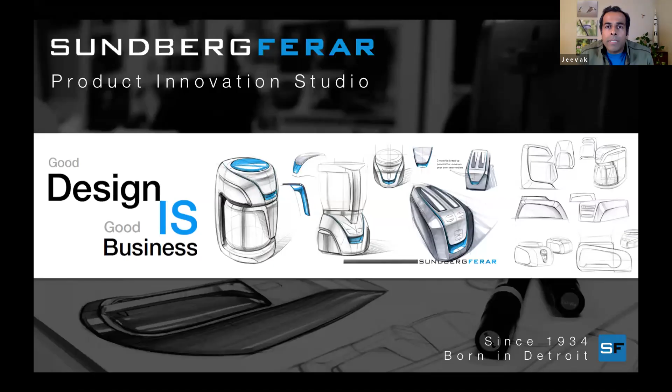Thank you again for having both of us, and Sundberg Ferar, for this wonderful evening. I know we have a time docket of 15 minutes, so we'll try to cover specific elements during this time. As we start, we'll introduce a little bit about the studio, and then jump on the theme of the evening, the collaboration part, and then we'll try to show some real world examples that are happening right in the studio back over there, so we can talk and discuss about that.

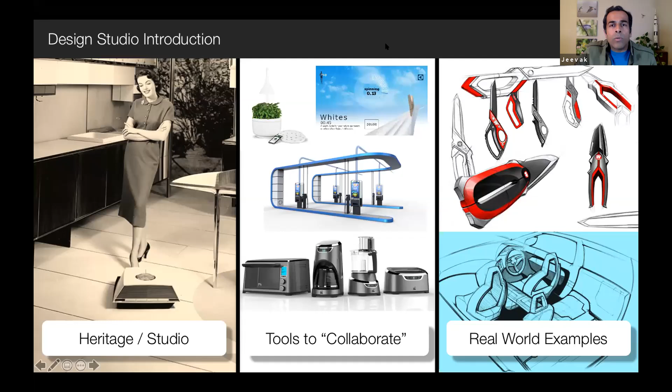We are proud to be born in Detroit. Not me, obviously, I was born back in India. I came here only 19 years ago, but the studio is one of the pioneers of industrial design in the entire nation, and I'd say North America too.

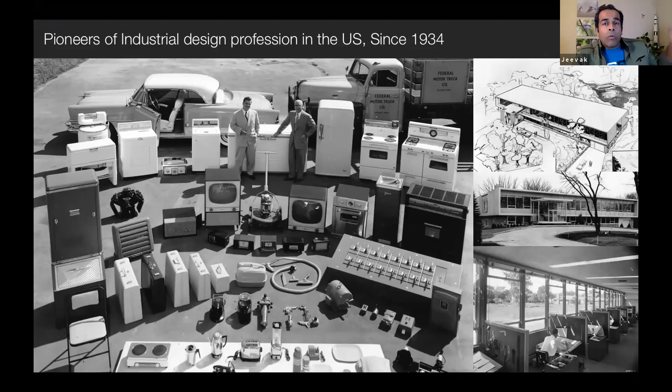Since then, we've been doing objects of everyday use, B2C, B2B, and a range of different things. From there till today, we still precisely do the same things. The culture, the context, the ecosystem around the objects change, but we as a human species are highly reliant on objects and the way we have to think about human centricity behind that. That's what makes design more and more interesting.

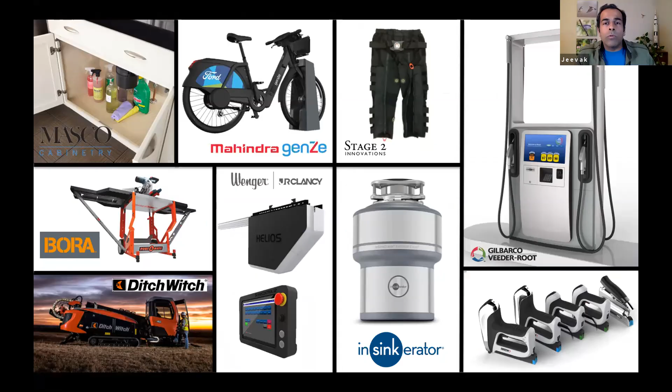B2C, right now, what you'd be seeing is more B2B. But before we go further, it's a team over here. Right now only me and David are representing, but we are a team of around 20 people, all based in Detroit, no other branch anywhere in the world. Together, we make design happen.

It's a design consultancy. We work for startups, we work for middle-sized companies, we work for big entrepreneurship, big enterprise companies also. But one thing people always mistake about an industrial design studio is they think we're a bunch of kids with markers and crayons in our hand, and we just do things beautiful.

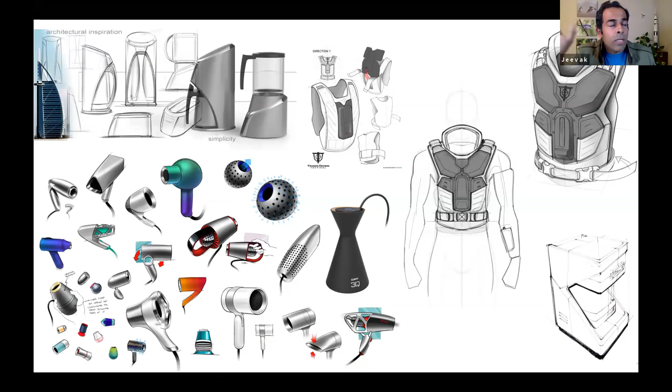Literally any good design studio anywhere in the world will always start in the world of usefulness, the use cases, the usability, the efficacy of use, the efficiency of use, the ergonomics, and then eventually into the world of beauty - meaning beauty will always be there, packaged in that. But understanding how it evolves in the entire ecosystem is the main element we have to focus on.

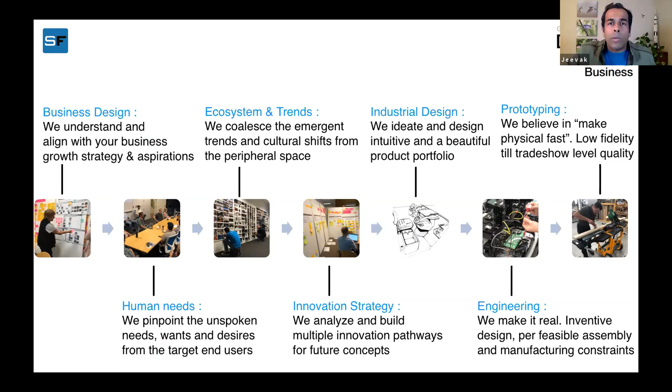That's basically about the design studio as such. About the context of collaboration - it's such an important word to go forward with. We have to begin to understand what are the best ways to collaborate, how to make sure ideas transfer from my mind out on the table, and then into your mind, through a whiteboard or any other fashion. As a design studio, we typically immerse ourselves in the world of 2D ideation.

Eventually sharing that with the studio and making sure we're collaborating with other disciplines, collaborating with vendors, with the super users as such. But one of the predominant tools we use for collaboration is making sure to have some physicality of the product right in the discussion - not just discussing in the air, not just with a sketch, but actually using a 3D sketch, a typical scenario in our process.

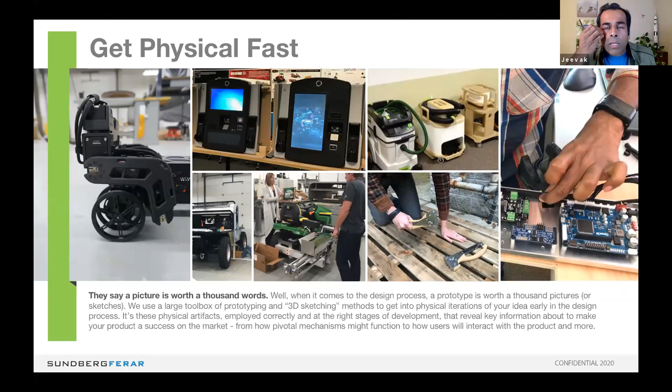One of the things we'll talk about today is the collaboration thing, how we use the Get Physical Fast tool - the mockups, the prototypes, the board, breadboard model mockups as such - to help get your idea from your mind outside so people can start collaborating.

It doesn't necessarily start with a sketch. If it does, eventually on the upper right you'd see there would be a low fidelity, low precious material model to be done to make sure people can react to it, respond to it, rather than anything else. Somehow my presentation is going on auto slide, but that's okay, it's just happening on the way.

So we'll be spending today's time understanding how to use that tool to really collaborate the idea and not lose plenty of things in translation. There's a range of different elements you can use apart from other tools, but today we'll talk about collaboration and how we can use it at different junctures, because we need that for a range of different things.

Case in point, a forklift - you and me all here right now can drive a forklift, maybe for 10 minutes, maybe for 15 minutes. But are we the super users? Are we using it 10, 12 hours a day, 6 days a week? Absolutely not.

As design studios, we can bring in the best practices, the ergonomical reach zones, the grab elements, the visibility angles, but we try to make sure you extract things. When you say participatory design, you have to go and make sure you extract those things from the real end users. And for that, just asking a question or filling a questionnaire is never enough.

Sometimes you have to create that stimuli in the warehouse or the elements where the forklifts are used. Go there and make these models. It is not design, it is still a 3D sketch. It is there to extract how people will react to it. And then we make sure we understand those elements.

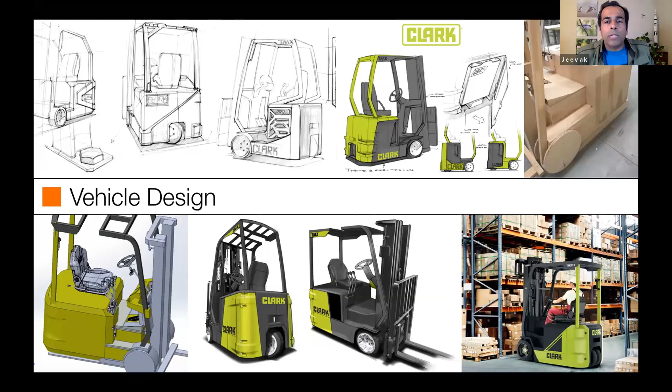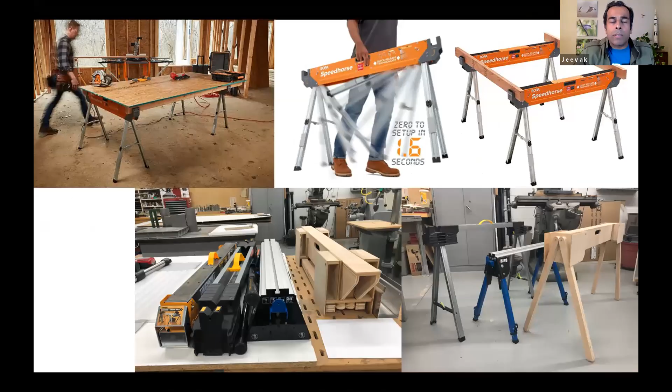So let me pause here a minute, and I will let David talk about the different ways we use design for either design research or the final part of design showcase. But right now, let's talk about design as part of an active innovation sprint. David, you want to add your thoughts about the way you use prototyping methods?

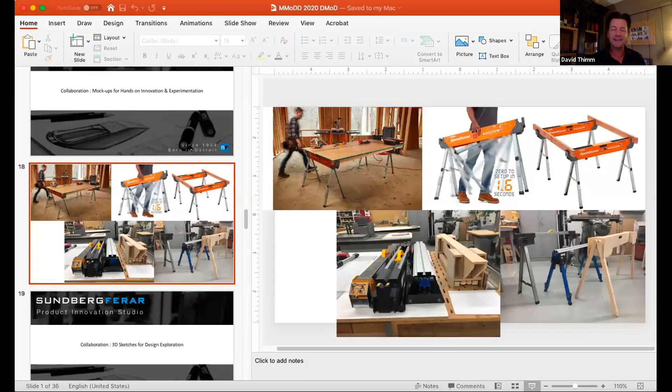Yeah, absolutely, it's such a valuable tool. I'm a CCS graduate from '91, and it was such an important part of the curriculum because instead of just trying to print things like many processes now, you actually had to go out and build it. So you learn a lot, just physically how things go together, what's strong, what's not. But it's also from a mechanical standpoint, anything that has motion or someone's going to pick it up and touch it with their hands.

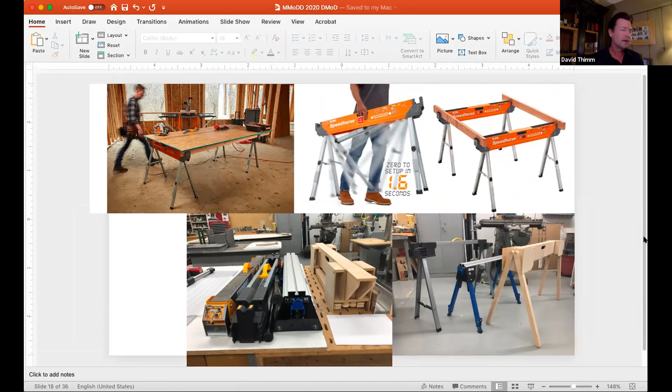It's super critical, because you think they might grab it one way and then you see they use it and hold it another. An example where you've got mechanical motion, you're trying to achieve a goal of deploying a sawhorse the fastest way possible. So you've got motion, how do you pick it up, what happens when the legs come out? The first mock-up you make, the leg hits you in the knee - okay, that's a valuable lesson.

So now you have to change that, right? Now it needs to drop down and swing away from you. So we use this as a tool for ourselves personally as we're trying to work out thoughts, but mainly as a collaboration tool, because now with our client, we can demonstrate why maybe a direction that they thought was totally appropriate and they were excited about, why it didn't work.

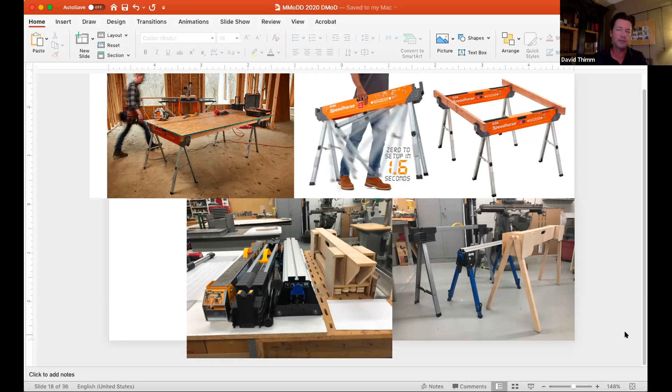So you can take them through the process this way very quickly and learn a lot and move forward. And now you have a foundational start for a mechanism, where you can get into that CAD and get more detail, but you can really get everyone to agree and move forward on a concept, developing it physically like this first.

One of the main elements to add is why people seek us out. As a design studio, one of the reasons they come to us, apart from plenty of others, is the rapid response, the agility, and accelerating the product design process pretty fast. Over the range of 87 years, we have found out - even in this world of virtuality and augmented reality, where we engage with a lot of digital tools - there is still no other option than to go into the real world.

If the product is going to be a 3D tactile physical product out in the world, then there is no reason not to invest a little time and a little materials to make sure there is form and function for that.

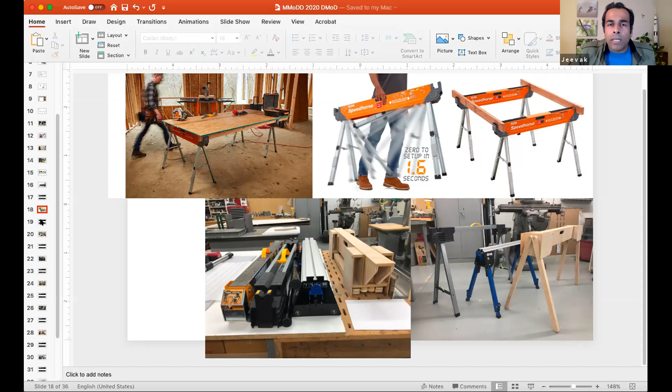As David was saying, the mechanism design, the fit, the function, the heft, the weight of it, the distribution of the weight - all those things, I would not say they're impossible to do in the digital world, but it takes a long time to arrive at that versus just going back in the shop. We have a shop and a studio right under the same roof, actively doing something, mocking it up, coming back and explaining it, and throwing that in front of the team, and then in front of the customer and the super users.

There are various different ways to make use of those hands-on elements. The fidelity is the main pivoting factor, because sometimes at the start of the process you have to be high on concept and low on fidelity, by intention, by design. Eventually, as you go from idea to concept, concept to prototype, prototype to production, you flip the graph the other way, where it's high on fidelity and low on concept.

But as soon as we start doing something, a designer or researchers come and do some sketches and renderings. At the same time, it might be a very literally simple foam core model, but getting it into the world of 3D, literally seeing how much volume it's going to occupy, how it's going to be maintained and serviced - all those different aspects start coagulating and coalescing together.

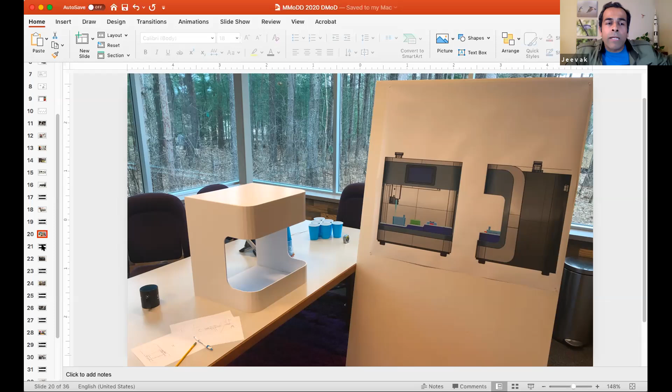So the fidelity should not matter. The way the sketch is done in the 2D world, in the same way we try to replicate that in the world of 3D in making those kind of sketches.

As a studio, we always use a physical example to go forward with, but we're also adept, and we do a lot in the world of graphical user interface and service design. Similarly, the mockups that you have to use in usability research - you cannot distance a graphic user interface from the physical product. If it is a physical product and the interaction is going to be there, it's nice to merge them together. The same thing happens for usability principles.

This is one of the prototyping shots from a gas station machine. It's still a B2B product - you and me are not going to buy it, but they're going to use it today and literally for at least 100 more years. How do you do that in reality?

The angle to be seen, where they will be at a proper height, what will be the other elements over there, and then testing out how the graphic user interface will work. Not only the design of the screens, design of the buttons, and the beautification part of it, but also the logic and the navigation and narration of how you are guided into the interface along with the architecture of the product.

Because a successful product is a molecule of four things: the hardware, the graphic user interface on it, the digital twinning of it - how you extract the data back to your place - and the service part of it. So they always have to be seen together. And the more you experiment, the more you storytell, the more better and valuable it is.

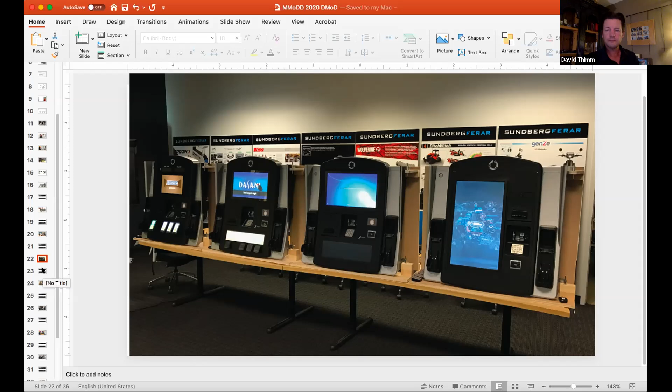So this is where, before you put hundreds of thousands of dollars into tooling, a validation tool helps gather the team around and just see things come to life. I think the critique level, the information gained, is something anyone would do, and I highly recommend it.

But seeing those 2D sketches and then the CAD come to life, something you can physically touch and move around and understand - again, all the physical attributes of the interaction points with it - extremely valuable. Shapes and blends and surfaces are all fine-tuned in this process.

This is something that, depending on the investment in it, you may do a couple of times. We do prove-out models sometimes just to work out a mechanism, something very simple. But other times it's very detailed.

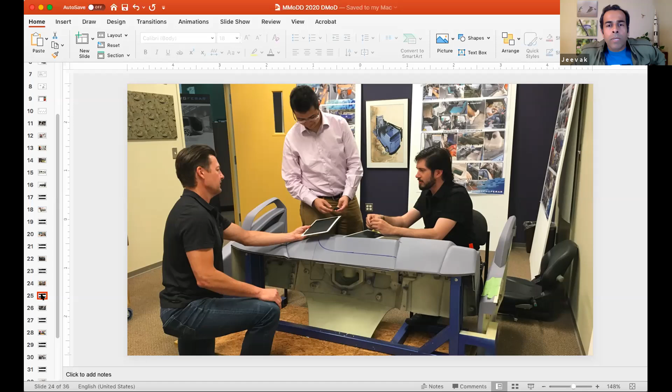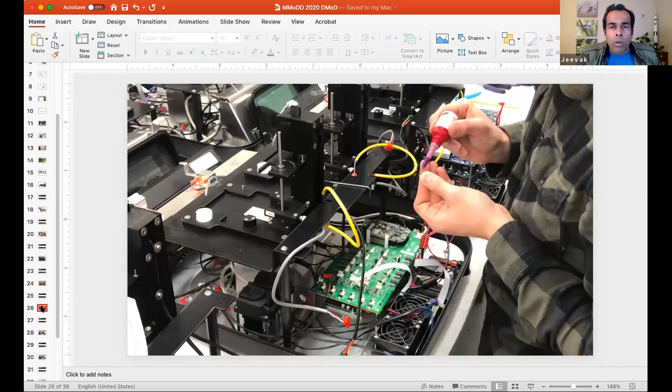So it is literally now converging together to the final pre-production or production level. There will be other elements of modeling too. As a studio, we handle the mechanism part, the looks and aesthetical part, but we also have to handle more and more the electronical parts too. So even breadboard level modeling, a different form of benchtop models, both can have parallel processes. You can start your architectural packaging from one side, and on the other parallel side, still do your demonstration and technological proof outs.

Sometimes we do it, sometimes the actual inventor or startup community does it, and we try to make sure we create the proper enclosures for it to finally go and sit in the commercial stage. When we say collaboration, it happens in the physical world, the form world, and also in the technological world.

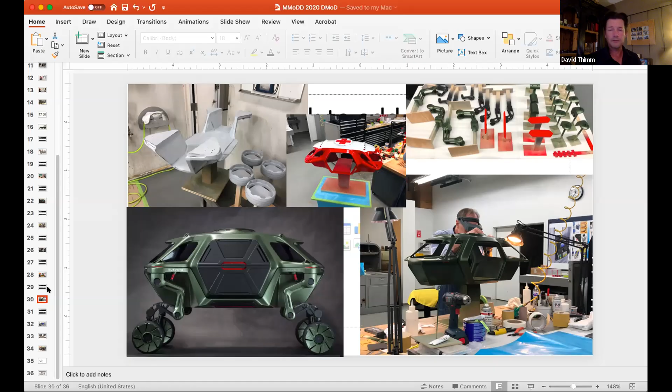And that leads to the final element of how the full functioning prototypes are used, sometimes directly as a beta field test. Once you go with the entire elements as such, you can still extend to the pre-production or production level model making, which can actually be used to test in the field the abuse and misuse that happens in the first generation of products, so we can design products to be apt, rugged and robust, and still get data back.

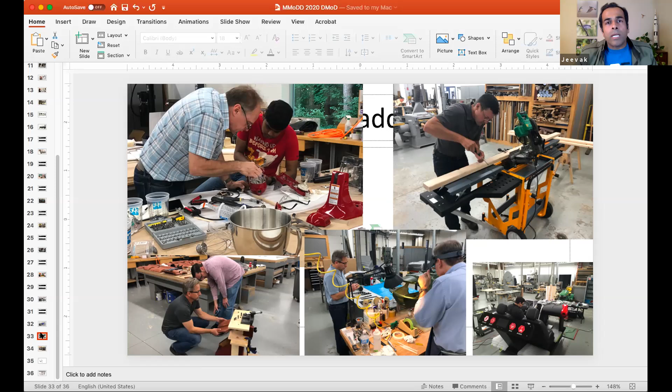So that's the full gamut of how you can use physicality as a real part of collaboration. And you will see in the closing remarks, like anybody in the studio, we are designers, researchers, strategists, business people. We all are not only encouraged, but we insist people make sure they get their hands dirty, fold back their sleeves, and just get doing it. That's how you jumpstart the entire process, and at the end you literally have everybody smiling.

I really don't know, David, what's happening over there? What makes you smile? I think we are almost at the time limit. Do you want to close out our thoughts on what we do in collaboration?

Yeah, we were laughing there because we were watching you present something on the web. There's a lot of different video out there of you, so it was just a highlighted one. But yeah, it's just a valuable tool.

And it's something we try to use at the appropriate time. So sometimes right in the beginning of a project, sometimes right at the end, or smack in the middle. But every project has a little bit different flavor, and it's a great collaboration tool, whether you're trying to understand the size of it, ergonomics, or just a visual surface evaluation.

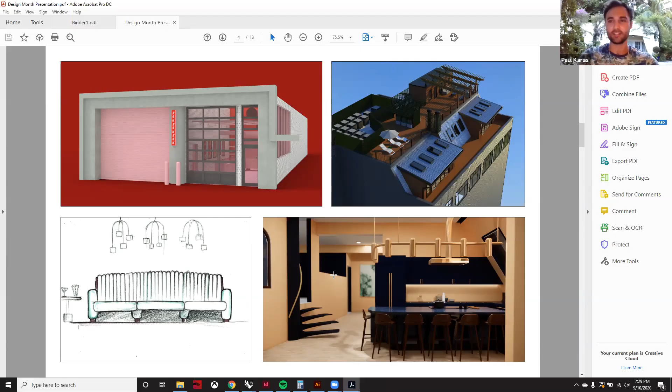Like how do I move into it, figure out where to put things, figure out what it looks like. I've been, over the years, wedging myself into this position where either I have a client that is a small business owner looking to design and build a space, or someone who has a weird extension onto their home that they're not exactly sure how to deal with.

So I'll visualize, I will organize trades behind what I design, and I will work with them to come up with really unique things. Here are some examples of more of the build side of what I'm up to, where sometimes I'm building furniture. Maybe it's something I'm building personally, but I'll contract out to a couple other people for trades I'm not very versed in. But there's other times where I'm acting kind of like a general contractor, where I'll have a carpentry team, a metalworking team, and a masonry team to accomplish all kinds of things.

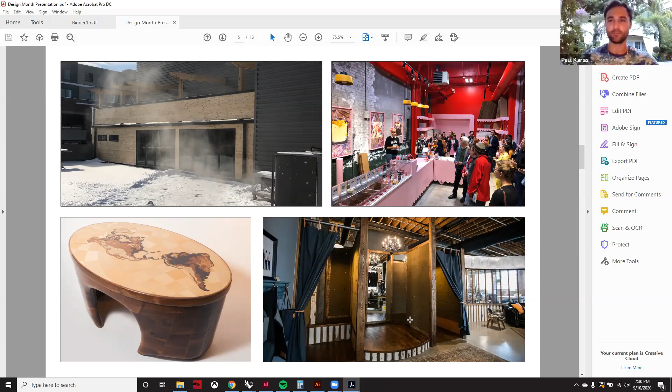So you can see some of the builds. This is the dressing rooms for Detroit Denim, which involved a lot of woodworking, metalworking, and upholstery. Connecting those dots was a large part of it. You can't just essentially submit drawings to a fabrication firm to get these things built. There's a lot of back and forth and a lot of collaboration in that.

You get feedback from the expert that might be building a certain thing, then you change your design. I would say design build is a very highly collaborative environment because of that, because you have so many overlapping trades.

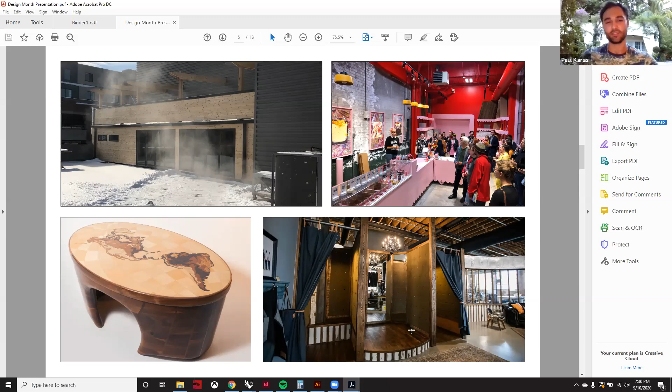So also recently I partnered with Urema Inc. I would say it's a high-end surfaces company, but similarly a design build company, where we work with artisans to create really unique spaces, really unique things. He works primarily in high-end residential, but some commercial. And I'm on the team to kind of push the visualization and push it to a different point, and organize the trades similarly as I do with my own company.

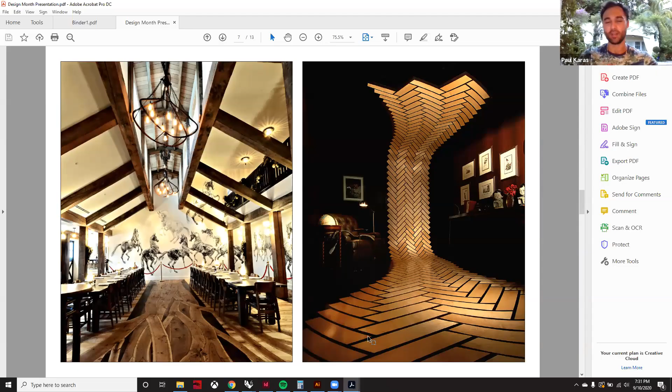This is, for example, a highly collaborative project that we're about to get working on, where as you can see we have a ceiling that is all beams. So there's woodworking, there's plaster involved, so we have to get someone to put up plaster. There's LED lighting that features certain areas of this. There's a hand-hammered fireplace that involves three different metal craftsmen to make.

And there's a lot of back and forth involved with that, so there's a lot of, hey, you can't do this, it'll have a problem when you install it. A lot of, maybe that'll cost too much to do it that way, so you should alter your design.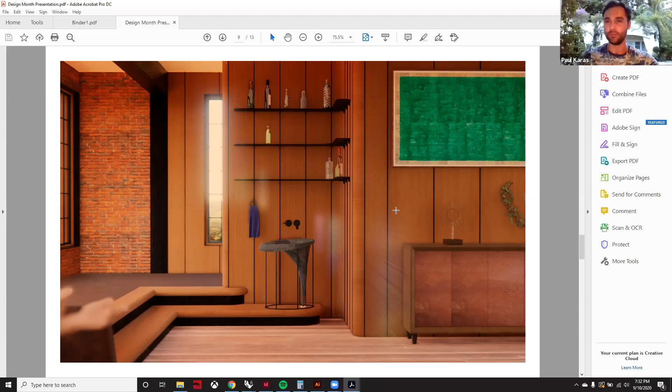But Urema has a very good reputation in surfacing, like floors primarily, but we're moving on to walls and ceilings. So in the same way that I work for myself, organizing trades, I'll be working with him.

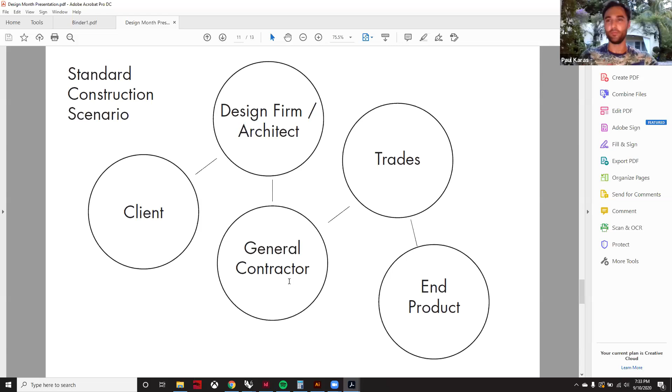So to kind of explain a little bit about how important design build can be and how different it is, I would say this is like a pretty standard scenario that I've worked personally, either as someone doing fabrication or that Urema gets contracted for, where you have a client, you usually have a design firm or an architect, which are communicating directly with the general contractor, which communicates with trades, and you eventually have an end product out of that.

That's a pretty simple process, but we have a lot of work in New York, and we're encountering something that's more complex, which is a necessary evil for the size of projects that they are. But as you can see how far the client is from the end product, there's a lot of, I guess you could say it wouldn't be bad, but there's a lot of communication involved.

There's a lot of bureaucracy that comes with it, and it's very difficult to get these highly unique environments built. It takes a long time. One thing you sacrifice with an organization like this is it takes a lot of time.

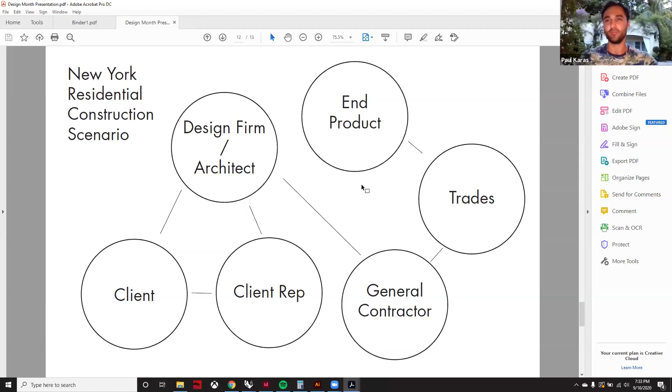But as I said, sometimes you have to have a lot of different entities to make something very special. What I'd like to forward, and which is a much cleaner way, but for smaller projects, is to be the design build entity. So between client and product, there's just one face, one company handling everything in one basket. Because of that, it allows you to do a lot more highly unique things and provide a more collaborative environment to get these really unique items.

So one thing I'd like to present to you is my experience with Castalia Sfumato. Isabel briefly mentioned it, but it was, or still is, praying COVID ends soon. It's a bar, so it's a little difficult to stay open at the moment. But it is a very unique environment that would not have been possible in any other scenario other than a design build. There are just so many different facets to it.

This is its current state, on 2nd and Alexandrine in Midtown Detroit. It was a Victorian building that had a previously unused basement, which we dug out. The owner of the building procured a liquor license and courted tenants, and the tenants hired me to manage and design this bar and fragrance store.

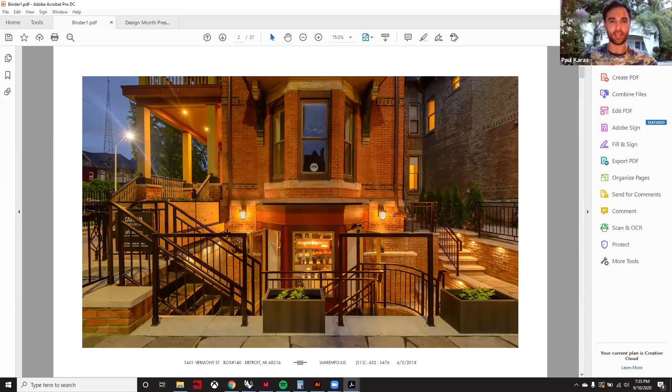As you can see before, it looked a lot different. The ceilings were short. There was still a front lawn that didn't have any way to access the basement, so we had to organize digging it out. On the note of collaboration, before we even had a shovel in the ground, we had a landscape architect out, and fabricators out, to start thinking about how do we enter this space safely, to ADA requirements, and also to satisfy the Historical Commission of Detroit, because it accepts historical tax credits.

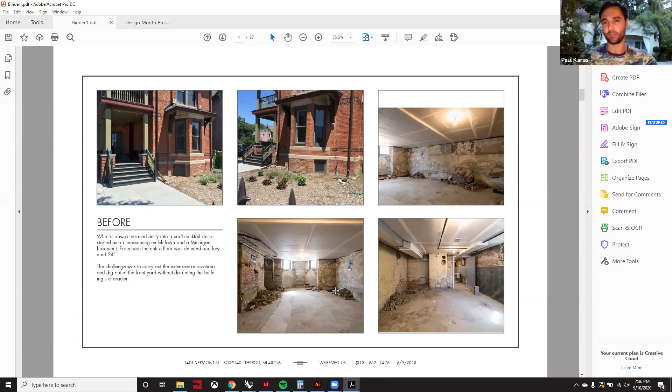So there wasn't really a straightforward way to go about it. This is where I really learned the value of having one entity along from the start to the finish of the process, because there were so many different factors.

It was highly collaborative in the beginning because it was a very small space. So we had to think about where does trash go, how do customers enter and exit, how do they go to the bathroom, how can we get a kitchen. I say kitchen with quotes, because it's really a sink and some refrigerators, clearances, everything touches itself, there's no extra room.

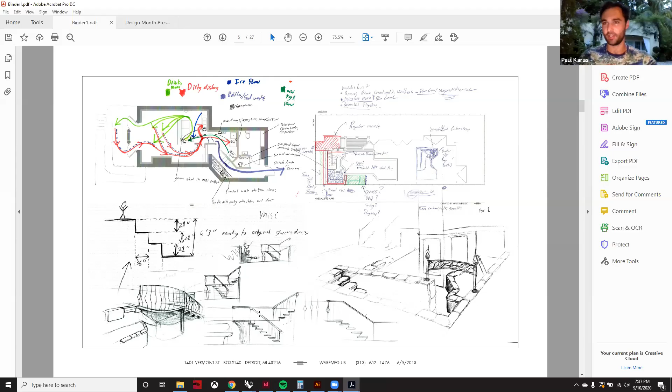And to solve for all of these different uses, we all had to be at the table talking. When I say we all had to be there, it was the building owner, the fabricator, me, and the client. We all had to think up solutions that would be appropriate, while also constantly thinking about budget, timelines, and feasibility. What happened, though, was we had a really informed process, and we got to build some really unique things for the space.

As you can see, these are some very iterative sketches from the beginning. We got really into bringing their logo and branding into the space, which was something they were very passionate about. I came up with some ideas, the owners came up with some ideas, and we started to narrow things down into a much more diplomatic way, where we constantly had to quote everything to see what we could do. That was possible because I was sitting at the table for all of these conversations that would absorb all of the needs.

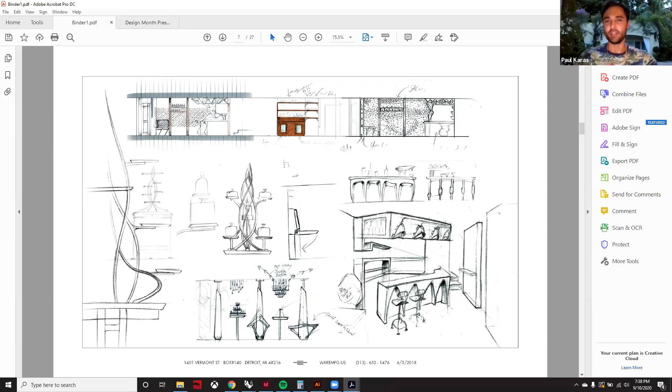Just to run through really quickly how it functions: it's a 640 square foot space, with a small entry in the front.

This is showing it in a retail mode. So in the day, it functions as a retail store where you can buy fragrances, and at night it converts into a bar.

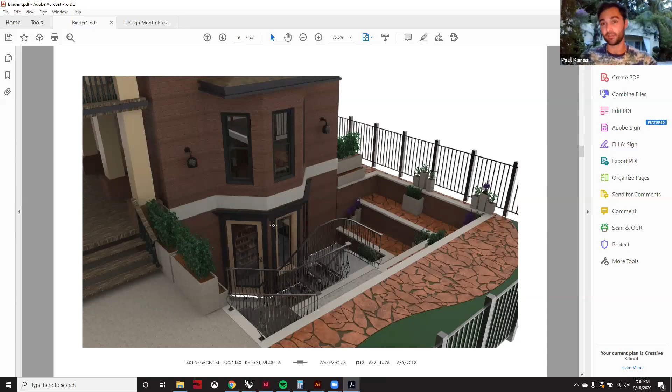You can kind of see we went through a rigorous rendering and modeling process because we had to problem solve, especially for the staircase in front. But there's a lot of details in it, like these twisted finials to represent the branding when you walk in.

We had, again, had to think about flow of customers. There's a lot of dual use areas of the basement that allow for fold down tables, allow for basically retail displays that can pull out of a wall.

So I just really tried to highlight the entire space to bring, as Sundberg was talking about, the mix of virtual reality and the real world.

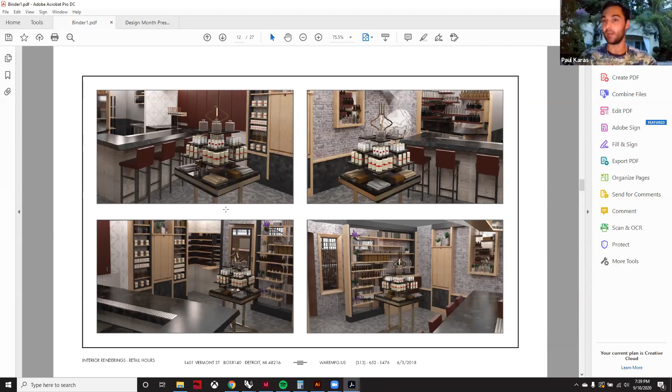I really had to rely heavily on this because all of these renderings were done before we had put a shovel in the ground. We really wanted to know where everything was going to be before we started laying plumbing, and there's a lot of factors that went into it. So we had to engineer along the way, constantly changing things.

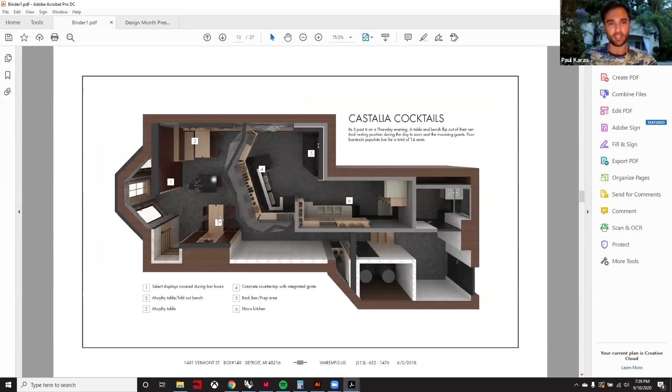And this is just shown in the bar mode per se. So we have seats that come out, there's tables that flip down, and people can enjoy a drink. You can kind of see the similarities between the two views, where it's small, subtle changes because we really had to keep everything in there, or everything in the room, inside the room.

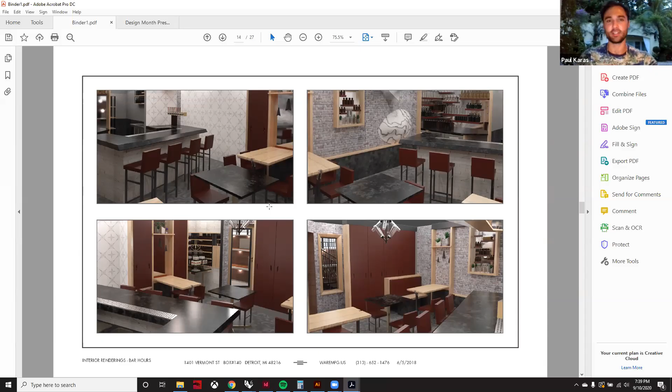There was nowhere else for things to go in this scenario. You couldn't move all the chairs into the back room. Everything had to kind of be and remain in the same place.

And I would say the collaboration between everybody is what made it possible, because we constantly had challenges. Like, we hit a water main, and then we had to move where we initially proposed to put a staircase, which is tricky because we really didn't have that much room to put an elevator or something for ADA. So we had all these other debates to worry about.

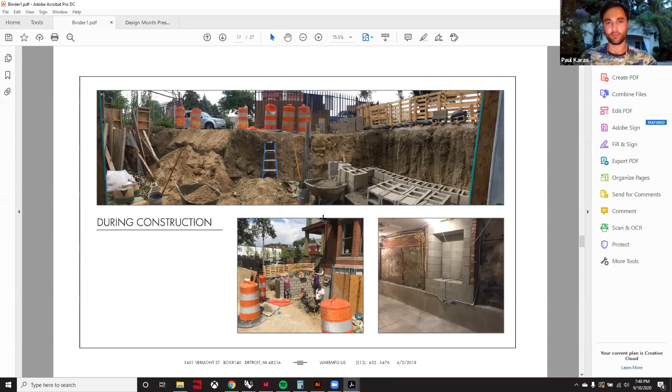But after that process was done and we went on into the final finishing, my clients are really passionate about using local makers and creating a unique experience and unique objects within.

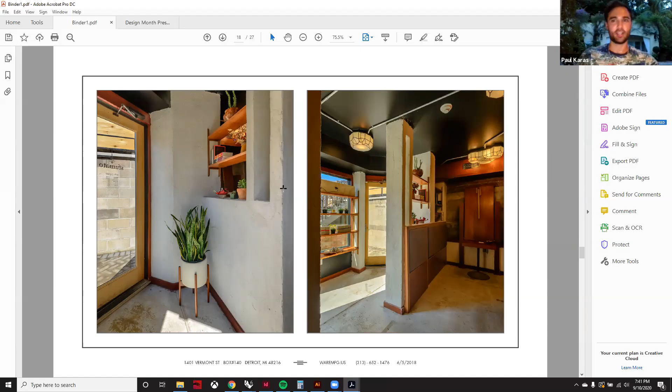So what ended up happening was, way early on, there were all these trades that we were talking to, kind of thinking about what we could put in the space. And because of it, it ended up being super unique.

The millwork ended up being something that had to be built on site. With a couple other woodworkers, we all kind of got together and built this all, but it was very collaborative. There was a lot of input on how to achieve certain things, how to do things for the best aesthetic.

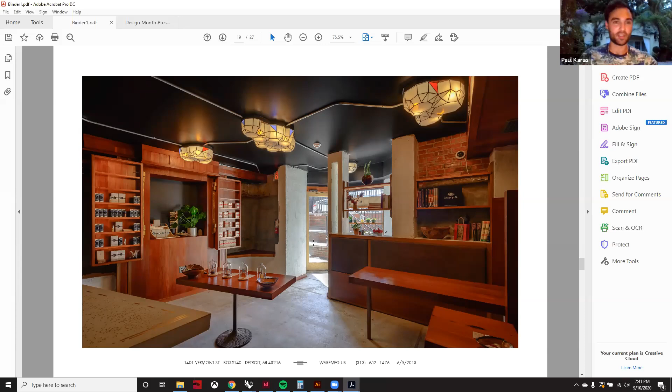And one other portion of it too that was really interesting was there's all these other trades that I normally wouldn't have interacted with, like leaded glass, who created these different chandeliers for the space.

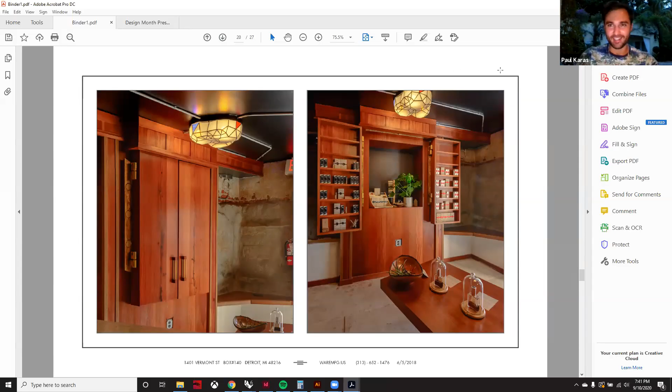So I would say we had Donut Shop Design build out some planters for us. We had Deep End Studio do some of the metalwork for us. We had Line Studio Detroit do some countertops for us. We had Born Building Code do some of the millwork for us. We worked with a landscape architect who works for the city right now, Jeff Klein. We had a plethora of masons, a plethora of mechanical engineers come through the space. But I would say the list goes on and on.

But what made it so special was that we all had conversations along the way, and we all met at the same table and discussed what our outcomes were, and collaboration really brought it together.

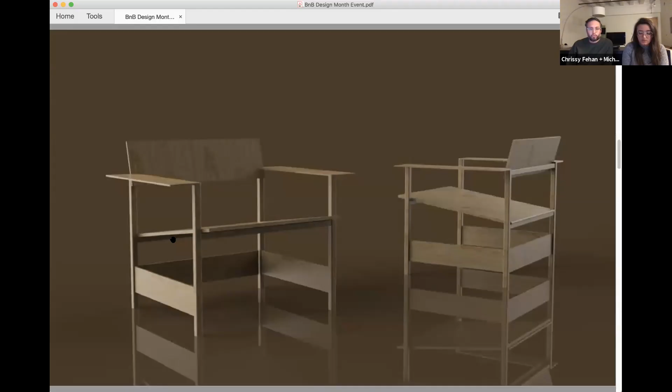So we worked with Virtuoso Design Build, and we're actually sitting in the chairs right now, which we're really excited about — we just got them today. Comfortable? Yeah, I think we did one sit test. We wanted to bring them here. I think we need to do a little bit more tweaking, but as a first prototype, we're pretty excited about it. So yeah, we've been collaborating with Virtuoso Design Build, which is a local design and build company in Detroit.

They do a lot of spaces, custom furniture, things like that. Mike and I have both actually worked with them. I worked with them through our work at Pop House, and Mike's worked with them on his space.

I designed our studio at Denso, which is pretty cool looking. We used a lot of white oak, which is the same material for these, and we had them do a whole wall for us. So it was interesting learning how to collaborate with each other.

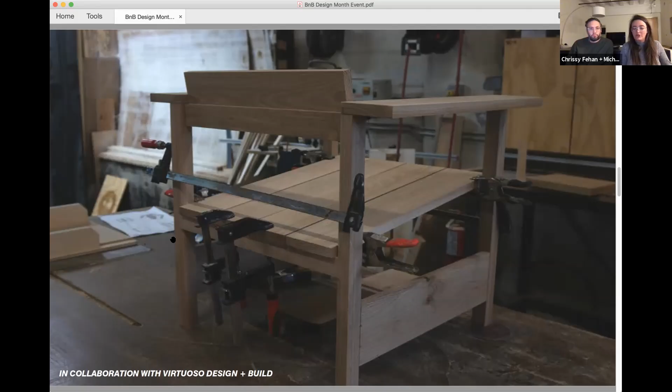We're really proud of these chairs. We've done things down to the details where there's no squared off edges, so it's like a round smooth finish. If you were to sit on something, the handrests are really wide, so you can set your drink down, you can put your laptop since we're all working from home. We really worked through the details with Mike and Mark.

He's been helping us a lot too with, if we take these to market, how we'll build them, how to flat pack them. So if we do get traction on them and people want to possibly purchase them in the future, we would figure out how to flat pack them for shipping out to people.

And then this is our second project, the dog pedestals. This actually started a while back. We were looking for a pedestal for our dog, who you might have seen jumping around a little bit. The issue is there aren't a lot of good dog pedestals out in the market. There were some nice white ceramic ones that we saw once, but they didn't really have any extra added value that we were looking for.

In this case, what we wanted to do was design something that had form and function. One of the interesting things here is you can actually bring up the bowl and you have all your extra food there, so we don't have to run back to our pantry to go grab extra food, we can have a little extra sitting in there. This is actually a terrazzo looking pedestal at the base, and then a stainless steel stamped bowl, which are made here in the US as well.

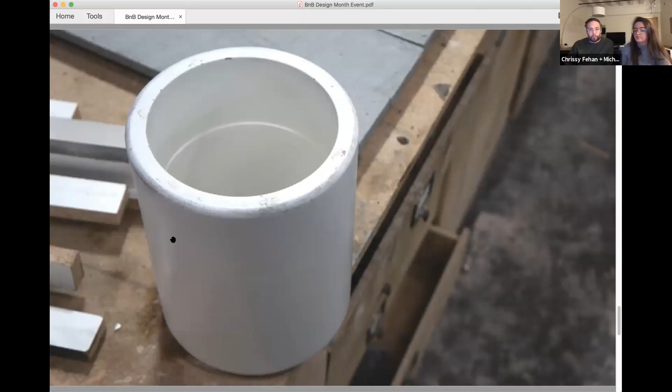They've been really excited too, because they're testing out a new 3D printing process. They printed our molds. The 3D printer really allowed us to get our logo in the base of it. I don't think we have an image of that on here, but we are going to have our branding on the bottom of it. It was kind of fun that he just got this new toy in the studio, and he had the opportunity with us to test it out.

But they've been fantastic to work with. If you're ever looking for anything concrete or anything with aggregate placed in it, they're great to work with. I think one thing that we've noticed as a struggle with our current situation is really being able to benchmark products. Obviously we're a small husband and wife team, we've got our jobs during the day, we're not like at Michael's work where they're purchasing everything they need to benchmark. And it's COVID, so we can't run to the store as easily and go test a bunch of chairs or see what's on the market.

So I think that's one thing we've noticed during COVID that's been a bit of a struggle. We were benchmarking off of, we were up north at my parents' cottage, and there's a bunch of Adirondack chairs at our cottage and our neighbor's cottage, and running around being like, what do we like about them? What don't we like about them? Because that's life right now, and we're trying to be safe. So that's one thing we've had to learn.

I think us collaborating together has been interesting, and I think it's brought us closer together. It's been something we've been excited about in the evenings because, at the beginning of the pandemic, what do we do at night? So it was something that gave us some excitement to work together on. I think we had talked about doing this collaboration for at least a year or two. Definitely the pandemic kind of pushed us to really go after it, because at the beginning we were both kind of a little down and depressed, and I feel like pursuing this in the evenings actually gave us a little bit of happiness.